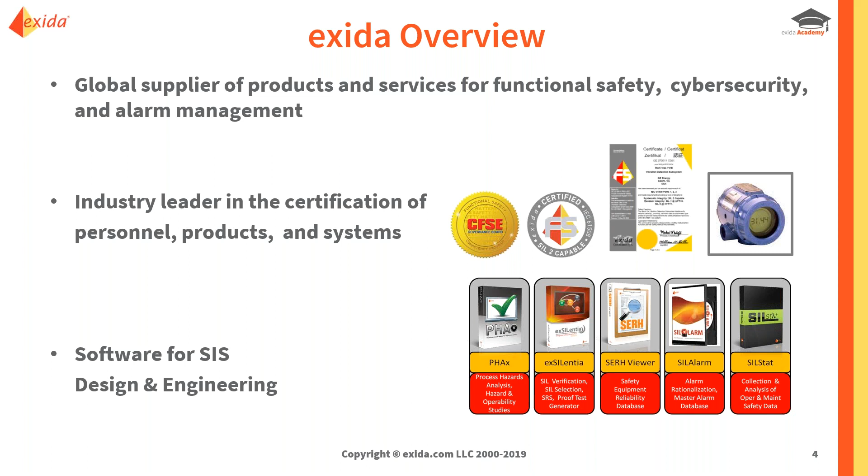The last thing I wanted to mention is we have a suite of software for safety instrumented system design that covers the whole entire functional safety lifecycle and connects with alarm management. It includes a tool called SILAlarm, which is for alarm rationalization and acts as a master alarm database.

So why don't we get started with our topic for today, which is on safe operating limits. We're going to talk about what they are, what are safe operating limits, why they're important, and then the bulk of the discussion will be on the results of a survey that we did several months ago that queried people around the world as to how they calculated and determined safe operating limits and how they used them. What we'll hopefully be able to see is some of the differences in how people approach it, and areas where training and education about what safe operating limits are for can be improved, and perhaps also where industry can jump in and make things easier for folks that need to work with safe operating limits.

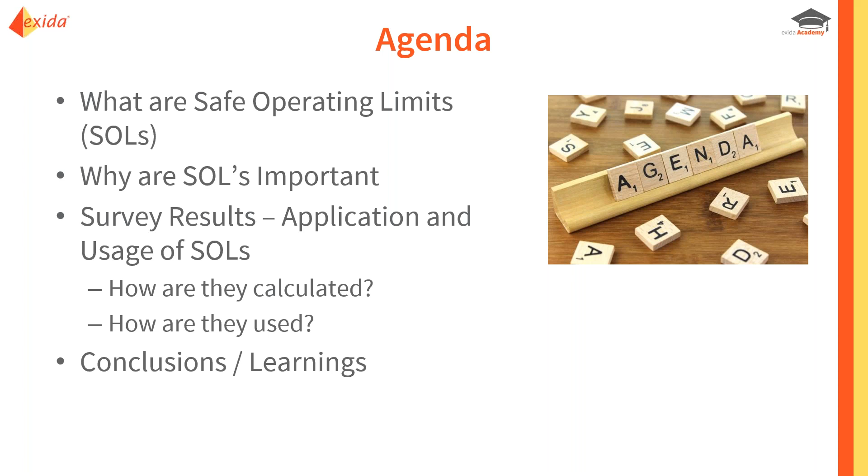This presentation we're looking through today is an outgrowth of one that was delivered recently at the 15th Global Congress on Process Safety. This same topic, the original results and a paper, were presented by my colleague, Denise Chastain Knight. One of the things that we'll have a link to after the webinar is over is the actual paper that has the details of the research in it, so you can download that and check it out if you're interested.

So let's talk about what a safe operating limit is. Conceptually, before we look at the detailed technical definitions, a safe operating limit is kind of like the speed limit for a process plant. You don't want to exceed it because bad things can happen. You can end up with an incident or an accident. So that's essentially the meaning of the term safe operating limit. Now, depending upon what region of the world you are from, you may not use this term in your day-to-day life.

You may not be familiar with it. It's specifically applicable here in the US, and it comes into vogue from the OSHA Process Safety Management regulation. That was where the term safe operating limit was sort of coined, and the requirements to have them were documented. So even if you are in a location where you don't use the term safe operating limits, or you're not required to worry about them, there's probably an analogous concept that makes this information still useful.

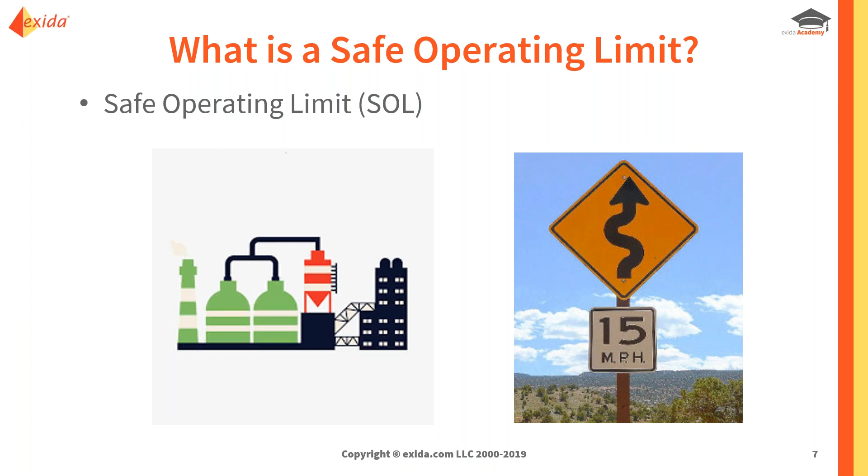So let's look at some of the detailed technical definitions. One of the problems with application and usage of safe operating limits is that there is not really a well-established definition that's consistent and easily accessible.

One of the more easy to follow definitions is on the CCPS AICHE glossary on their website, and you can see that here. And I just want to call out a couple of key elements of this definition, because what we're going to do is look at several of the definitions from different sources and kind of pull out the key parts to create our own working definition of what a safe operating limit is.

So in this particular one, the key elements that we see are that safe operating limits relate to critical process parameters, so things like pressure, level, temperature, etc. And they are established or calculated based on a combination of design limits and the dynamics of the process.

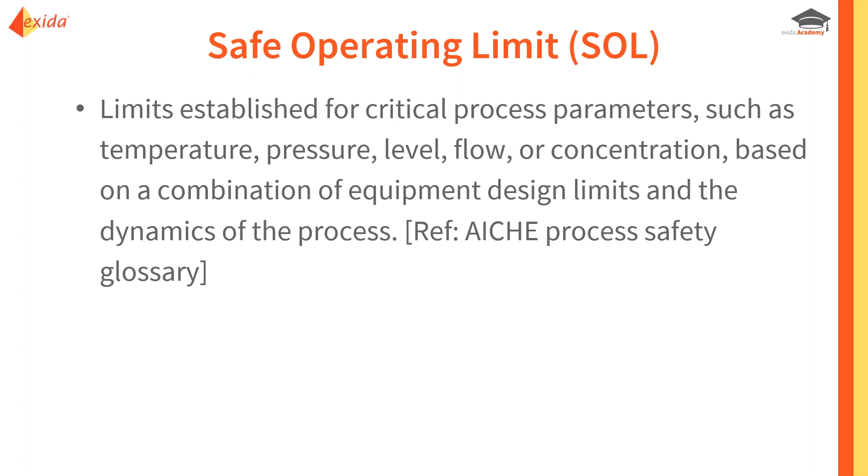Another definition coming from CCPS guidelines for engineering design, which up until now is probably the most comprehensive treatment and discussion of safe operating limits. It has a very detailed definition that you can see here.

Key elements that jump out here is, instead of focusing on limits, we're more focusing on an envelope that's defined by the limits, a safe operating envelope, with the idea that you should not intentionally operate the process beyond that safe operating envelope, or else you could end up with an incident or a catastrophic failure or loss of containment.

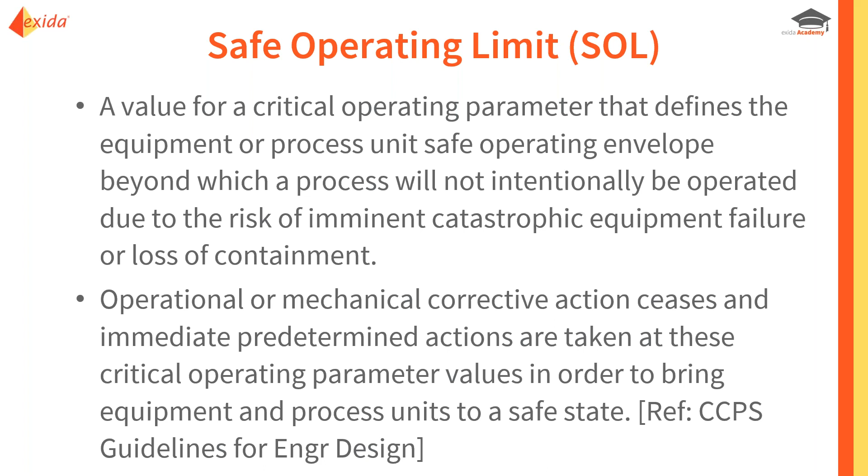The other key part in this definition is that if you exceed the safe operating limit, then troubleshooting by the operator and other investigatory steps stop, and predetermined actions must be taken. So this could be manual actions by the operator, or it could be automatic actions by a safety instrumented system. And their purpose is to take the process back to a safe state or back within the normal operating limits.

Another definition comes from a new technical report from ISA, Technical Report 84.00.04, Part 1. And this document actually does a pretty good job about expanding on what safe operating limits are, how they're calculated, how to think about them, and uses additional terminology that goes along with safe operating limits.

But here you can see their definition is a little bit of a combination of some of the things that we looked at before. But one of the new things that they bring in is the idea that the set point for an independent protection layer, like SIS trip point, for example, could coincide with the safe operating limit in some cases.

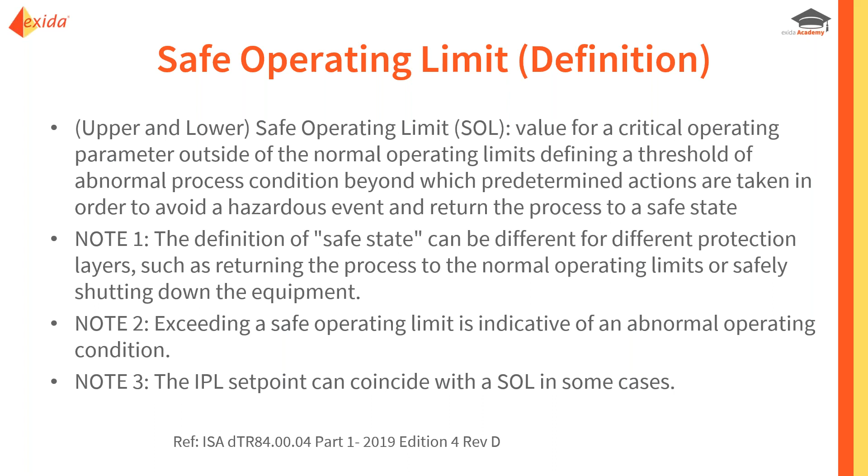So it does provide some guidance for how to think about relief valve settings and SIS trip points, how they would line up in relation to safe operating limits in the overall operating envelope.

Last thing that we'll look at is from the API. They have recommended practice 754, which is on process safety leading indicators. And they define, again, the safe operating envelope, where they more focus on the envelope as the part that's created from two operating limits. They also emphasize the element that if you go beyond or go outside that operating envelope, that's when troubleshooting stops and predetermined actions must start or take over.

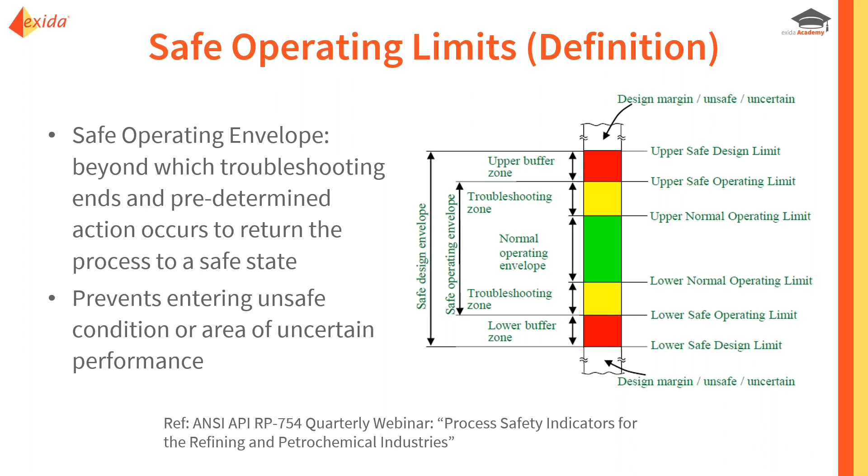And the whole idea is that this is preventing you from entering an unsafe condition or getting into an uncertain area. So that's the purpose of the safe operating limit.

So if we consolidate those together to create a working definition or a working criteria, it would consist of the following points. So safe operating limits are for critical parameters, so not every parameter necessarily would have a safe operating limit defined on it. And the safe operating limit must be outside of the normal operating limits. It kind of makes sense.

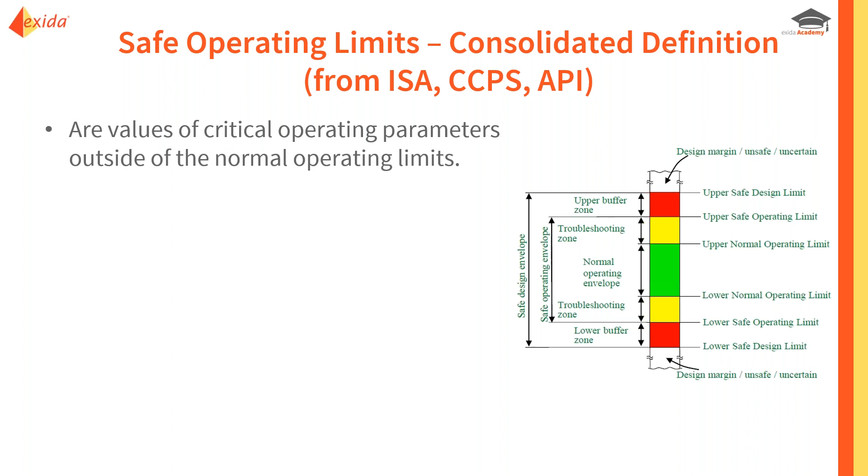Also, in terms of establishing what the safe operating limit is, that would be done by a combination of looking at the equipment design limits, more on what that is later, and the process dynamics, so rate of change, things like that.

It represents a safe operating envelope, and you should not knowingly operate the process outside of that safe operating envelope, or else if you do, then you get into a point where you must take action to take the process to a safe state. No more troubleshooting, no more optimization or control of the process. The idea is you've gone into an area where you should not be from an operational point of view, and you need to take the process to a safe state.

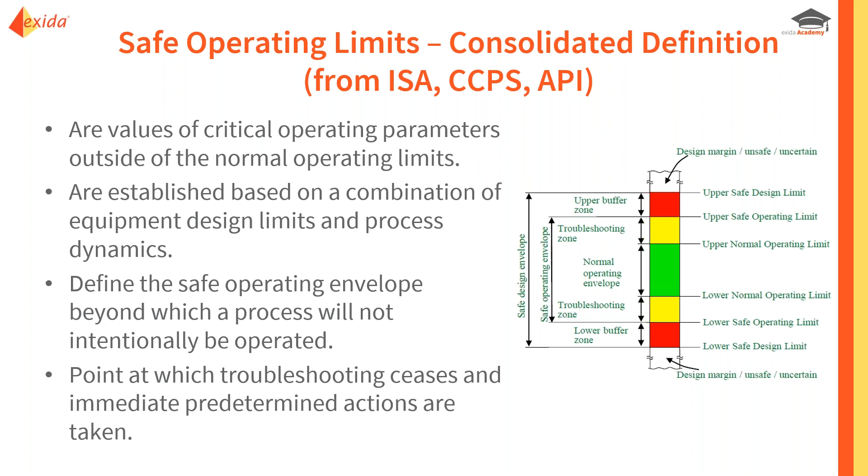So that's kind of the working definition that we'll use for this discussion as to what a safe operating limit is. So now let's talk about why they're important.

As part of the OSHA PSM regulation in the US, chemical companies and companies in the refining industry are required to calculate or determine what their safe operating limits are, as well as document the corresponding consequences of deviation and corrective actions that operators should take. So for any PSM covered part of a plant, that information must be determined, documented, and made known to people, including being put into the operating procedures so that operators are quite familiar with what those safe operating limits are.

Another thing safe operating limits are used for is they're defined as a process safety leading indicator. They're actually a tier 3 leading indicator according to this triangle diagram that we'll talk about more later. The idea is there are certain parameters that have been identified that one should track and watch, and you can use them to get a handle on where you are from a process safety management point of view and to drive performance improvement. So SOL exceedances are a specific recommended KPI, and they are a tier 3 KPI.

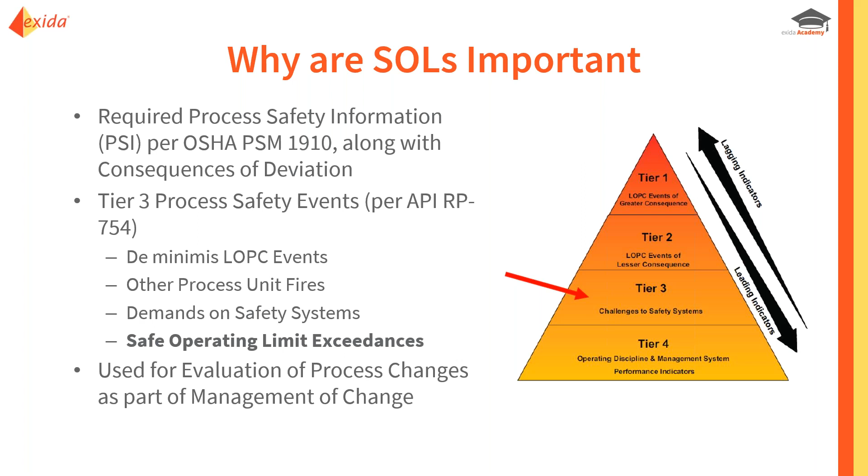The other thing safe operating limits are used for is an evaluation of management of change, particularly related to process changes, to make sure that a proposed change does not put the process outside of the safe operating limits, and if so, that would require some additional investigation, calculation, and documentation. So that's why safe operating limits are important, or one of the reasons they're important.

Another reason they're important in the scheme of functional safety is if you look at this stack up of independent protection layers, we can see that toward the bottom here is an alarm and an operator response, and then above that is a safety system and the trip. We could assume that your safe operating limits are somewhere in that region. They may be put in place with an alarm for the operator to respond to, or they may be such that if you go beyond the safe operating limit, then the SIS trips. So the takeaway is that they're one of the first layers of protection to activate.

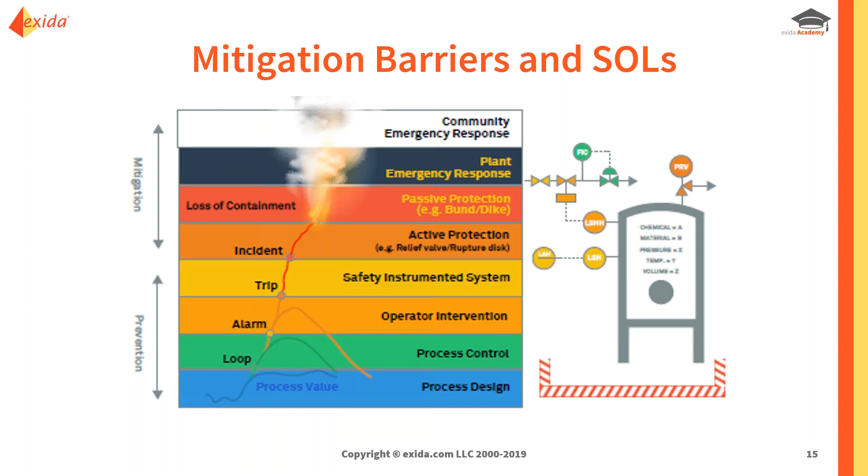So in terms of monitoring them and watching them and knowing what they are and how to calculate them, it's very important because it's a good indicator of whether you are progressing up this envelope of increasingly worse hazards or increasingly worse situations. It would help you understand how often you're potentially having demands on your safety system or your relief valves. Also, as one of the first layers of defense, if it works well, it can do a fantastic job of minimizing the demands on those other layers and preventing the escalation of a hazard to an incident. So it's really important to make sure that particular independent protection layer is working.

In terms of this survey, over 150 people responded to it. Could be some of you that actually took part in it. It was quite a global cross-section, as you can see from around the world. We had people chiming in with their information.

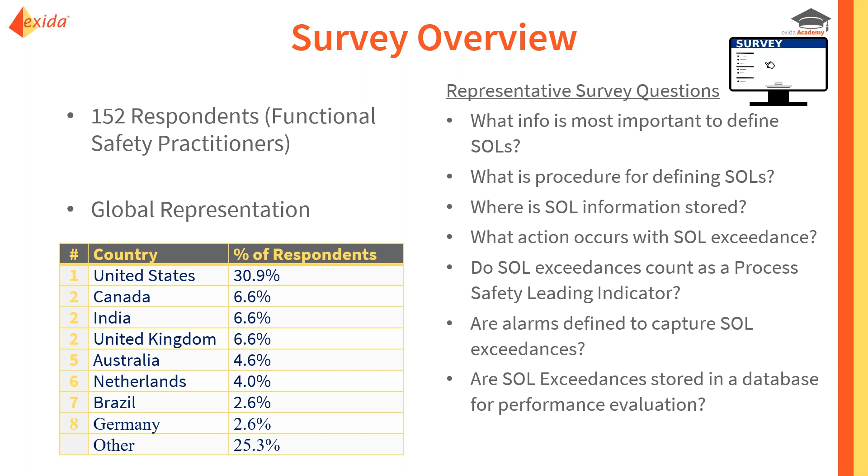Essentially what we're going to do now is go through the results, what we found, with the key questions that were asked, some of which are shown here. Things like: what information is most important for establishing safe operating limits? Where do you store safe operating limit information? What do you do when you have an exceedance? Let's take a look at some of those questions.

The very first one had to do with operational limits as a broader category. If you're familiar with defining safe operating limits, are there other operational limit categories that you also define as a company? Folks could select more than one option. You can see just about as many people indicated that they define or use safe operating limits as they do process control limits. Others indicated quality control, and then some people said they also define a whole separate category for environmental limits so that they can document emissions and effluent excursions.

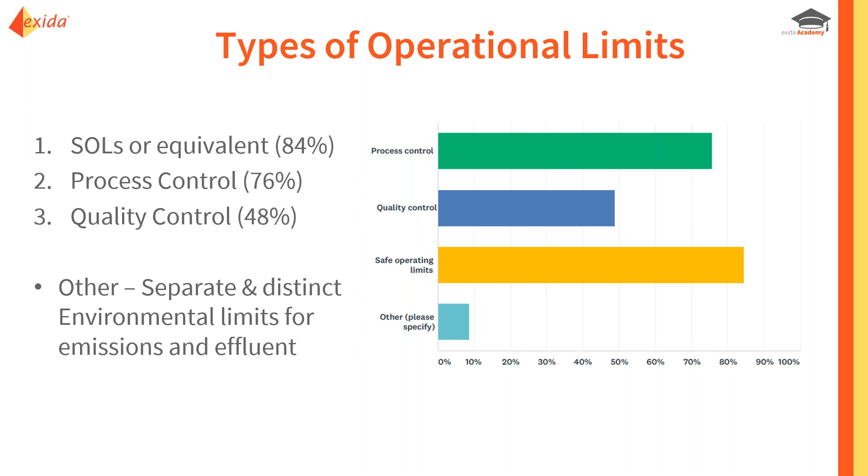Now, when it comes to safe operating limits, one of the key questions of this entire survey is: what information do you use or should you use to calculate your safe operating limits? This was a predefined list of choices. And if you remember the definition that we just talked about, where we made up a working definition, that should be brought into the thought process to understand the results here.

So the choices were: normal operating limits, safety instrumented system trip points and relief valve settings, design constraints such as maximum allowable working pressure, mechanical integrity limits, and integrity operating window limits. Based on the definition where we said safe operating limits would typically be set based on design limits and process dynamics, the expected answer was design constraints.

And you can see that that was the number one answer, but not by much. In fact, about the same number of people said safe operating limits are set by SIS trip points. And that's really not correct. That's backwards. Now, that may be an artifact of how the question was asked, or depending upon the facility...

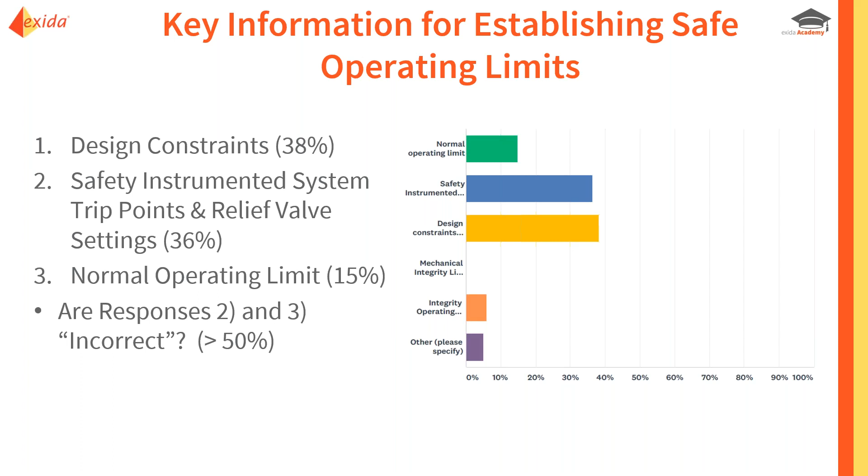So I expected some of those to be brought out as well. You can see that over half the people essentially said the SIS trip points or the normal operating limit, and those really aren't the major things that drive creation of or documentation of the safe operating limits. So this kind of indicates the need for increased training or understanding of what safe operating limits are for and how to calculate them.

Now, as the follow-up question to that, there was a freeform field for people to enter in more detail, at a high level, how they actually calculate the safe operating limits. This is just some of the selected input to highlight some of the key areas or key responses.

SOLs are defined by design limits and design constraints, as we would kind of expect, by process technology. Mechanical integrity was highlighted. Process simulation and using safety factors against design limits - there were a couple of examples of that as the methodology for documenting. Some people called out the importance of process dynamics and making sure there was sufficient time for the IPLs to respond. Another respondent mentioned risk-based inspection of equipment as it's installed and as it's working.

And then finally, there was one that said, in a lot of cases, as I mentioned, the design information is not available. So it would be back-calculated from the interlock settings or the relief valve settings, where you would assume that the appropriate calculations were done to establish them. And then by extension, you could come up with the safe operating limits.

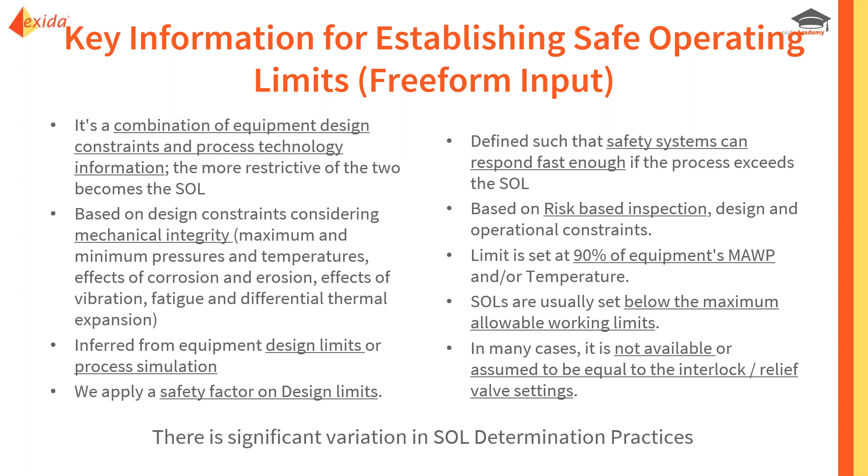So the takeaway here is that there's considerable variation in how people approach determining safe operating limits. So if you're going to use safe operating limits as a tier 3 leading indicator, the fact that everybody does it differently is going to mean that if you tried to compare results from one site to another, one company to another, you might not end up with the conclusions that you're hoping for.

Partly because safe operating limits mean different things to different companies. One of the other pieces of input that came in, I wanted to highlight, because this is pretty solid information about how we would typically think about how safe operating limits line up in comparison to other types of operating limits. What they responded with is: you have low and high settings for your operating range, and then next would come your alarm levels, and then potentially interlock levels.

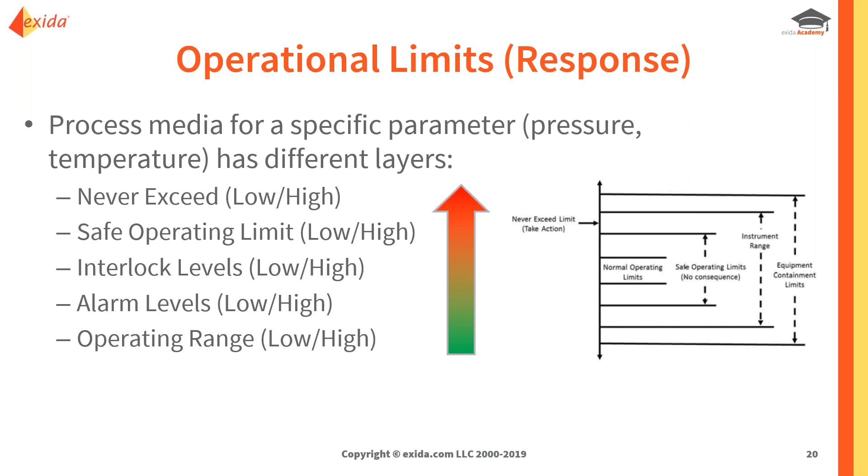Above interlock levels would come your safe operating limits, and then above safe operating limits would be your never exceed limits. We'll talk more about that term later. One point of confusion: one resource actually showed the never exceed limits and safe operating limits in a different order, with safe operating limits outside the never exceed limits, which contributes to confusion in how to establish safe operating limits and understand what they're for.

So in terms of where people document or keep their safe operating limit records, 30% of respondents said they consider the operating procedures to be the master location for safe operating limits. From an operational and operator training point of view, that's probably the best place, since those are the people who need to know what the limits are and what to do.

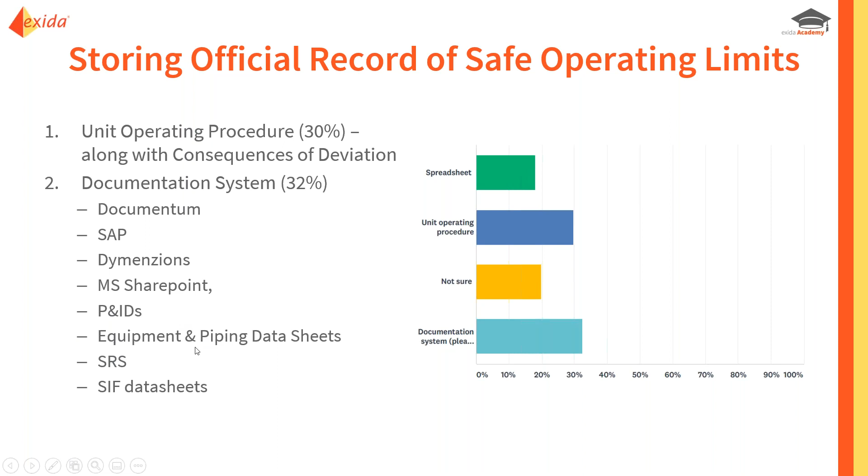However, if you're thinking about a single repository of all your safe operating limit information, and it's sprinkled throughout your operating procedures, it's going to be harder to track down and maintain management of change on those limits. So other respondents take a different approach: a single repository of safe operating limits. There was great variety in what system they use to store that information, from Documentum to SAP to SharePoint, and many other data systems or forms of documentation.

Another question was, do you periodically review safe operating limits? 63%, almost two-thirds, said yes. 37% said no or not sure.

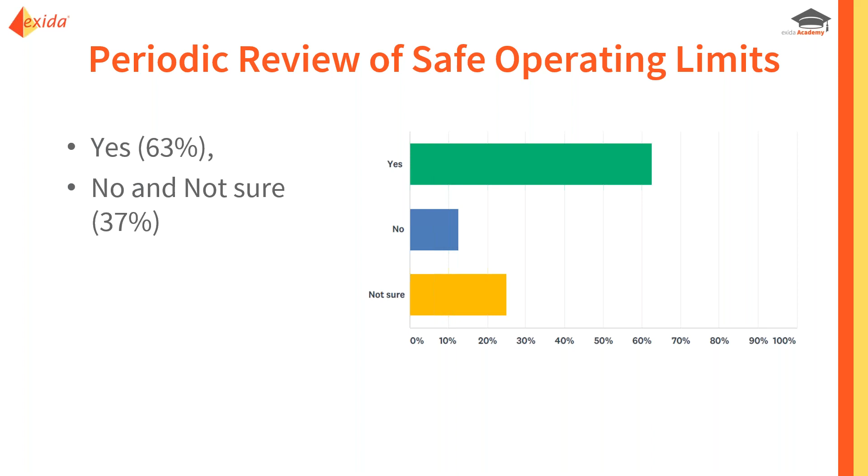What's important is that although safe operating limits might appear fixed throughout the life of a facility because they're based on design constraints, if processes, equipment, raw materials, and flows change, then it's very likely the safe operating limits may need to be recalculated or changed as well. So it is a good practice to periodically review your safe operating limits.

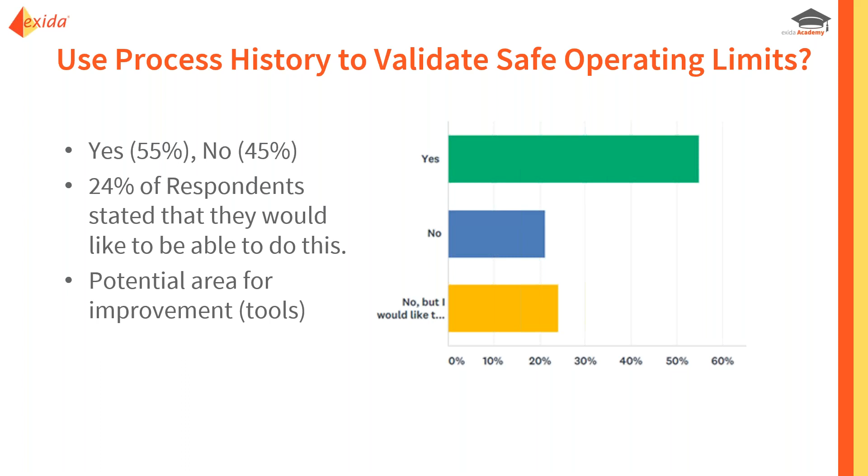Another question was whether process history, a data historian, is used to validate safe operating limits. 55% of respondents said yes, 45% said no or would want to be able to do that. Interestingly, 24% said they'd like to use their process history to validate safe operating limits, which seems to identify a need for industry, a potential area for tools to make that easy for people.

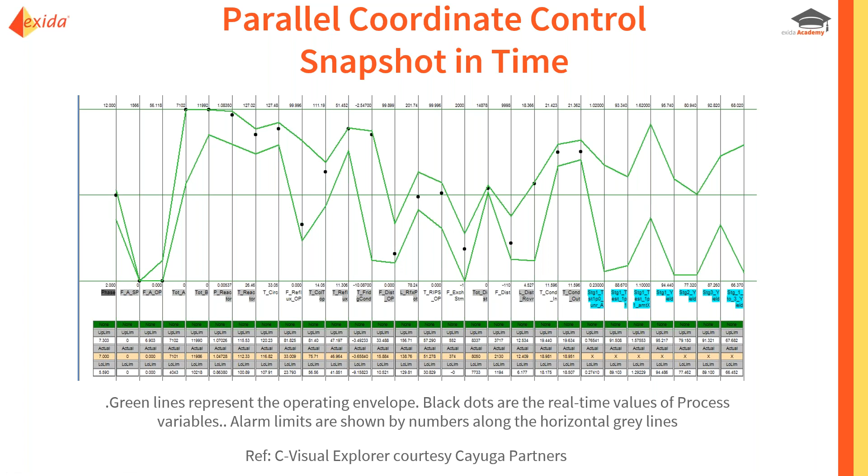Not only can you see those exceedances with this tool, but it'll also show you what else was going on at the time, and how other key process variables were behaving when you had this SOL exceedance.

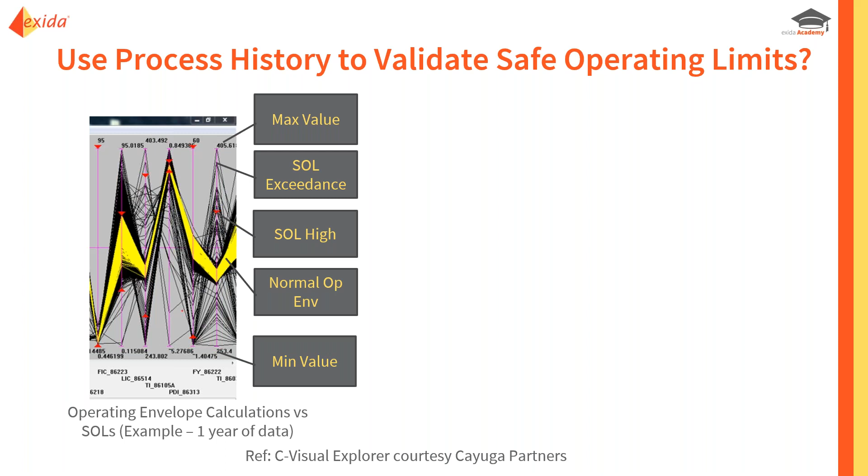So it can do a lot of useful information for you in terms of validating your safe operating limits. It could calculate the percentage of time that you're outside of your normal operating envelope, or outside of your safe operating limits. If you change the safe operating limits, it can retrospectively calculate what percentage of time you would have been outside of your safe operating limits with a certain change. So there's a lot of great stuff that it can do for you.

And as I mentioned, it really fleshes out the patterns showing the variables that relate to each other. So if you're trying to minimize your safe operating limit exceedances, not only does it give you visibility to when they're happening, but also help you figure out what caused it and what other key process variables are involved in that event.

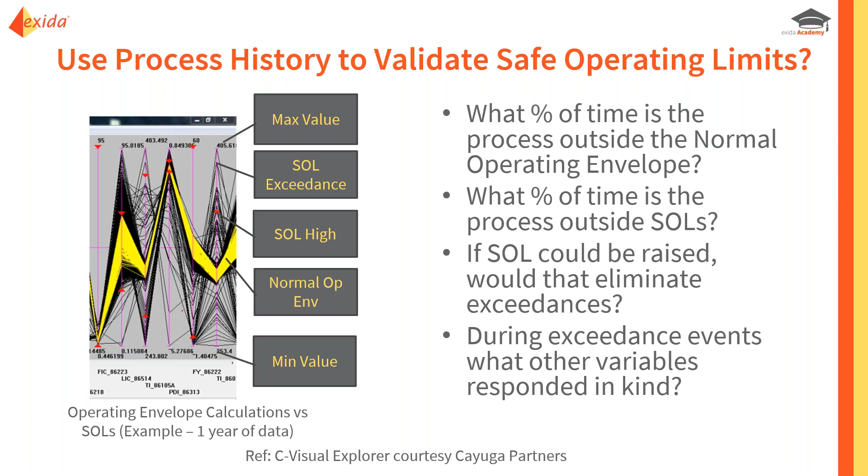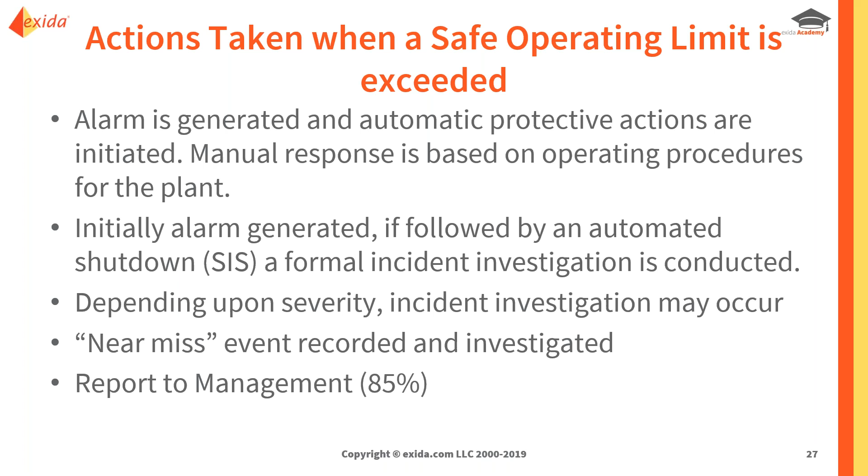So what do people do when a safe operating limit exceedance occurs? Most respondents said that they generate an alarm and take action, whether it's manual action by an operator documented in operating procedures, or an automated response from a safety instrumented system. A lot of people also referenced that an incident investigation would likely be started. Some people called out that they would categorize this as a near miss event and record it as such. And 85% of respondents said that one of the things they would need to do if they had a safe operating limit exceedance was notify management or report that to their management.

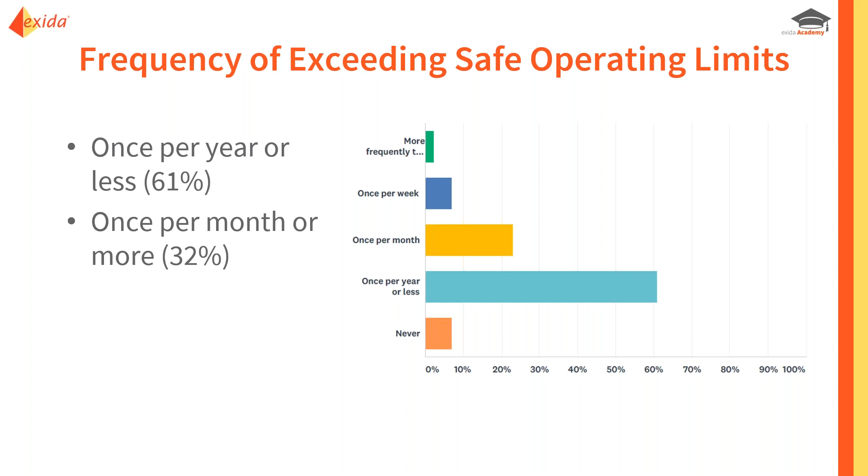So how frequently do these safe operating limit exceedances occur? Without the actual data and systems to do these calculations, this is kind of just an estimate. We can see that 61% of respondents thought it happened about once a year or less, and 32% thought it happened once a month or more frequently. So it's quite across the board there.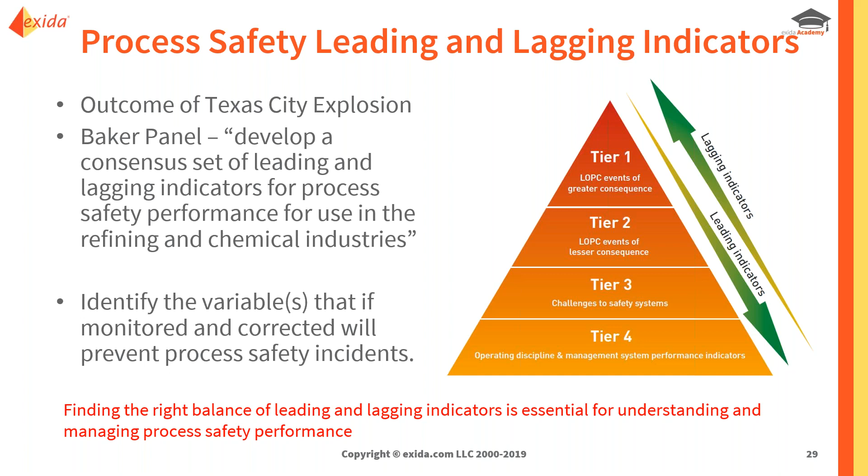And the area that you can actually track more and see changes is in the tier 3 and tier 4 leading and lagging indicators. In the tier 3 category, which is considered the challenges to your safety systems, that's where the safe operating limit exceedance resides. So the whole idea with leading and lagging indicators is to define some metrics that one can follow, calculate, monitor, and that will directly help you prevent process safety incidents from occurring. It's believed that monitoring of safe operating limits does have a direct correlation in preventing process safety accidents, because if you're monitoring those and seeing that those events are going down, that also means the number of challenges on your subsequent layers of protection - your safety instrumented systems or pressure relief valves - are also being reduced.

Now the IOGP reference on process safety performance indicators, report 456, which just came out in November 2018, goes through and documents the different tiers of indicators - what are examples, what are considerations, what do you think about. And one of the examples they fleshed out in detail for tier 3 was the violation of a safe operating limit, in this case for a storage tank. Because it is quite amazing the number of tank overflow incidents that continue to occur, even with alarm management programs and process safety management programs. So safe operating limit excursions was one of the examples called out in that document.

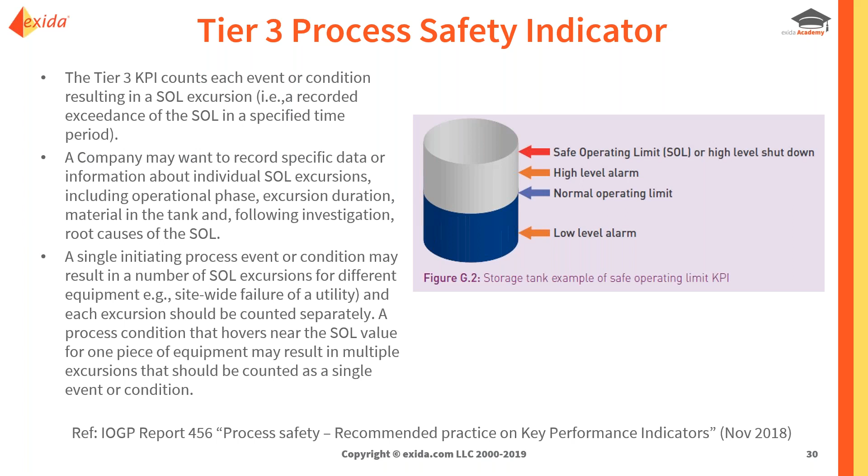So then the question was, how many respondents actually use safe operating limit exceedances as process safety leading indicators? And the answer was about 63% said yes.

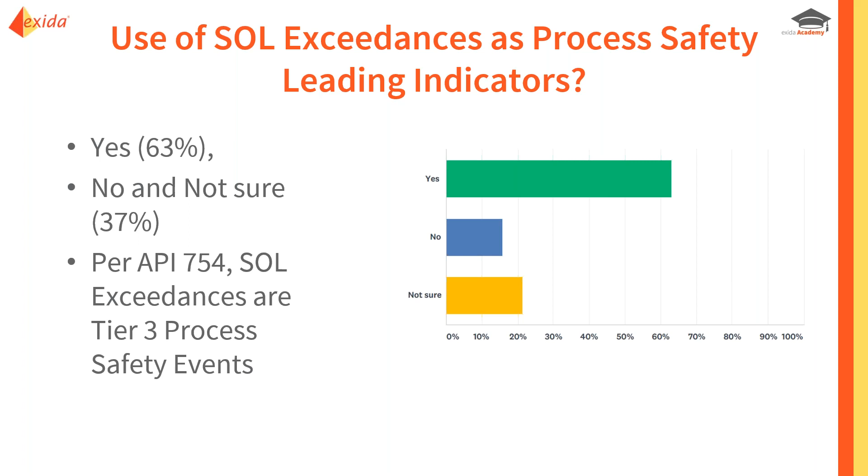Now, if all of the respondents worked in the US for a company or industry covered by OSHA PSM, that answer should be 100%. But because this was a global survey and the need to document safe operating limits is primarily an OSHA-driven requirement, the usage of leading and lagging indicators is a global industry best practice. So this probably provides some indication of the adoption of this, but expecting 100% probably wasn't realistic given the demographics of the respondents. So this does perhaps give some indication that the knowledge and understanding of safe operating limits, what they're for, and leading indicators probably could be improved.

One of the other questions asked about operators, in particular whether they are aware of safe operating limits and trained on them. 82% of the respondents said yes. And ideally, that should really be 100%. Whether you use the term safe operating limit or not, whatever your analogous term or concept is, operators really do need to be trained on what the safe operating limits are for their associated operating areas. That should be part of their operating procedures, reviewed on a regular basis as part of recertification of the operator or refresher training. So those are pretty important things - for them to know the safe operating limits, what to do in the event that they exceed one, and what the consequences are if they don't respond. All that should be well drilled for the operator.

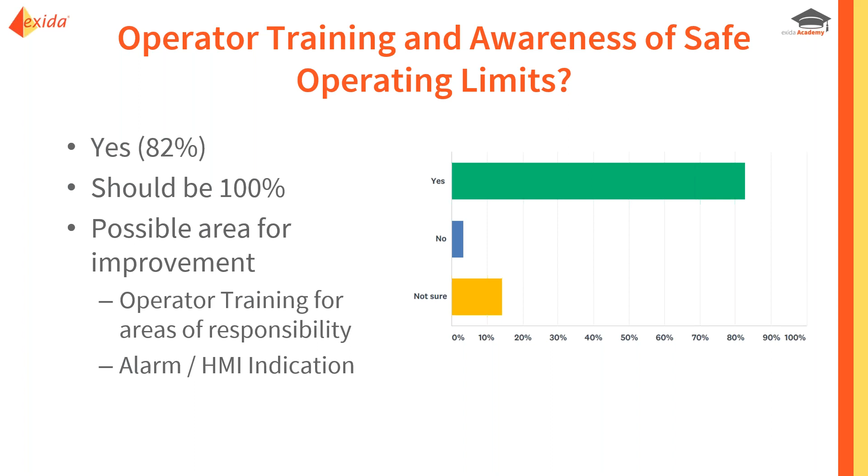In addition, the information about safe operating limits and the visibility for the operator should be thought about in the alarm system, and considered significantly in terms of presentation on the HMI screen - whether it's different from other alarms, perhaps the color, the priority, and the horn tones used to announce that one of those alarms exists. It definitely makes sense to think about whether special treatment would be warranted for SOL limits being violated.

So one of the other questions was, would it be beneficial to have safe operating limits available when you're conducting a PHA, a LOPA, or an alarm rationalization? And 95% of the respondents said yes.

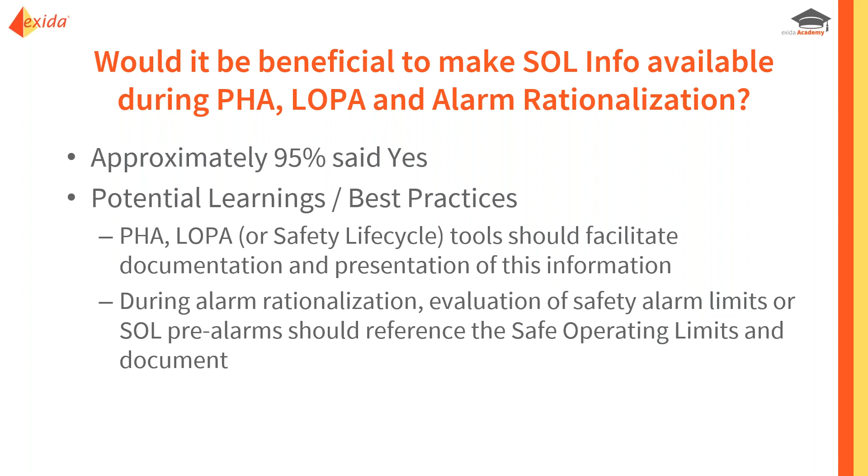So that is a potential learning or takeaway for tools that help document process hazard analysis, LOPA, and alarm rationalization - that there should be a way to easily document safe operating limits and other operating envelope considerations and design constraints, and to be able to reference that appropriately as you're going through the task.

Now, when it comes to alarm rationalization, certainly alarms that are there to prevent an SIS from tripping, a pre-trip alarm, or to prevent escalation outside of the safe operating limit - information should be available about what the safe operating limit is, because the limits should be set in relation to the design constraints or other layers of protection.

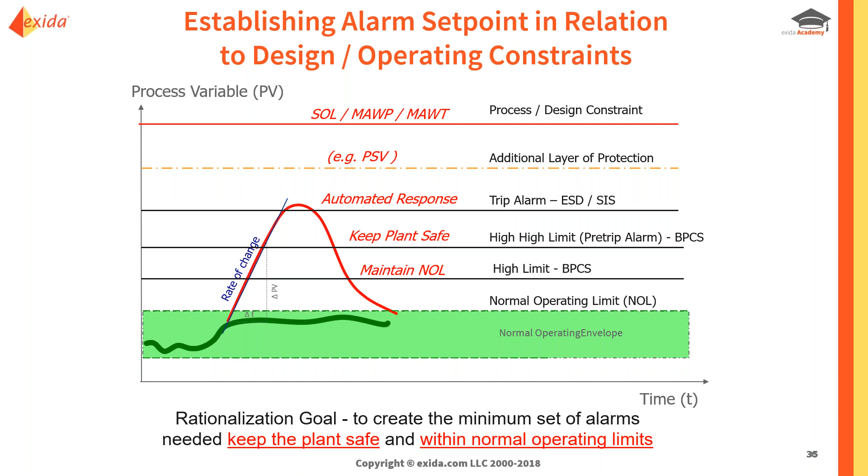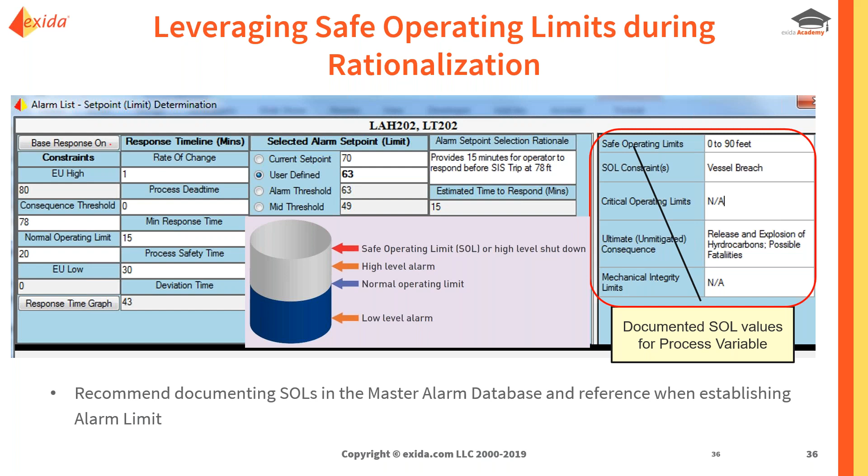So it would be very beneficial, very useful, very important to have information on your safe operating limits, ideally right in your master alarm database, so that you can factor that in when you're evaluating whether the alarm limit is set appropriately. Here you can see an example from our SILAlarm tool showing the ability to capture and see what the safe operating limits are when we are defining what the alarm limit is.

So then, speaking of alarms, the next question was, do you define alarms in the control system to help you indicate an SOL exceedance? 69% of the people said yes, and this is really different from my personal experience, having done multiple alarm rationalizations and philosophy creations over the last 10 or 15 years.

I don't see this talked about very often. So the question is, is this data misinterpreted? And I think perhaps the question wasn't framed specifically enough. It could have been interpreted as, do you get an alarm from the events that occur when a safe operating limit is exceeded, such as a relief valve lifting or an SIS tripping? You may get alarms or notifications associated with them, but not necessarily related to the safe operating limit unto itself. Part of what this question was getting at was whether people use alarms to identify that a safe operating limit has been exceeded.

Now, if it's an alarm that the operator needs to respond to, then for sure you have alarms to do that. But if it's for tracking purposes, it might still be a good idea to use the alarm system, because it's the best centralized data repository of the performance data. So one could define alarms to indicate safe operating limit exceedances and set the priority to a log or journal, for example, where it's not presented to the operator. It just goes into the historical archive so that you could run reports and find out how often and when your safe operating limit exceedances occurred.

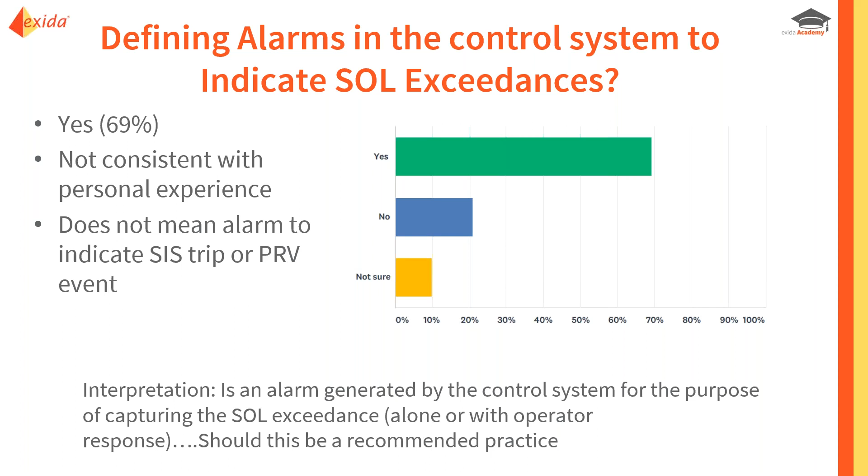Now, one of the other pieces of information gained as part of the study was that many people who record SOL exceedances or need to document them use a different system other than their control system, their HMI, to do that. And it would make sense to me that it would probably be best if it was in the DCS rather than a totally separate system that's one or two layers removed from the real data and the real action.

In terms of the recording of safe operating limit exceedances, 52% of the respondents said yes, 48% said either no, that they don't, or they don't but they plan to in the future. So again, this might be an area where tools could help make this process easier for people, and there appears to be a desire to do that.

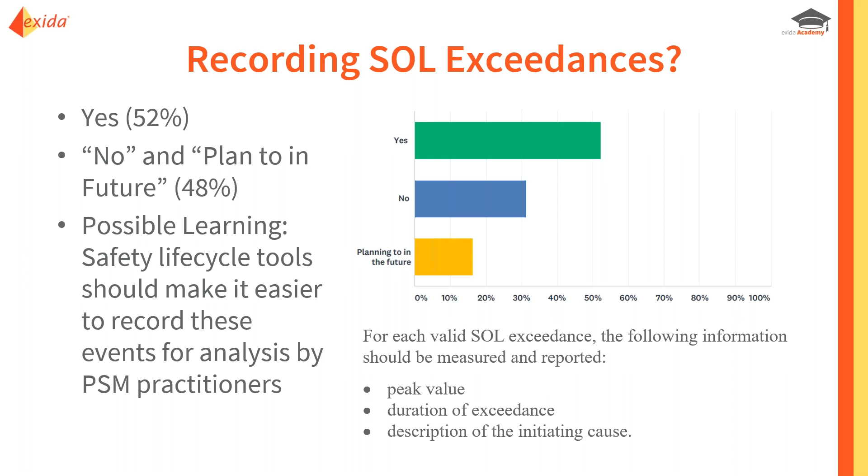The API standard talks about some of the other information that should be documented along with the exceedance, stuff like what was the peak value, how long it was in exceedance, and ideally to determine and document what the initiating cause was.

Now, one of the paths to increased standardization and adoption is a better definition for safe operating limits. It's also definition and consistent use of other terminology related to safe operating limits. We've talked about two different terms, one being design limit and another being never exceed limit. Now, the design limit is actually defined in the new ISA technical report number 4, which has some good definitions and guidelines for design limit, never exceed limit, and shows it pictorially in relation to the safe operating limit.

So I think for the first time, you have a figure that shows you where the normal operating limit is, where your safe operating limit is, how that compares to your never exceed limit, your design limit, and then where you would expect your IPLs, your independent protection layers, to be staged. Typically, their set points would be between the safe operating limit and the never exceed limit.

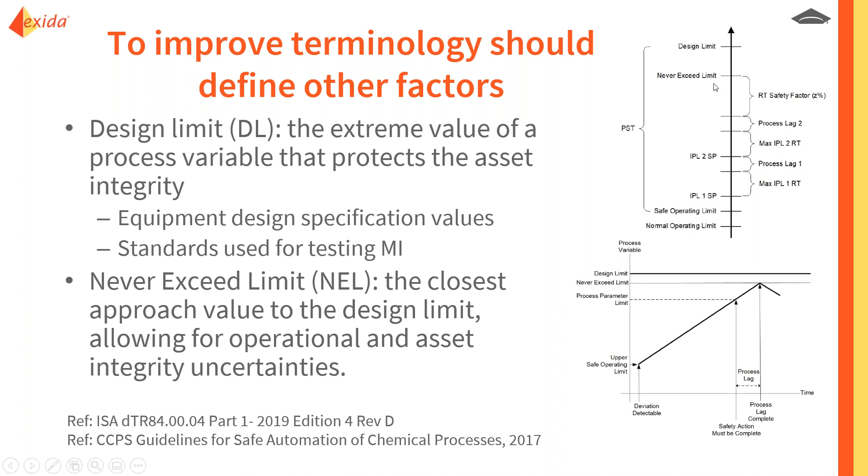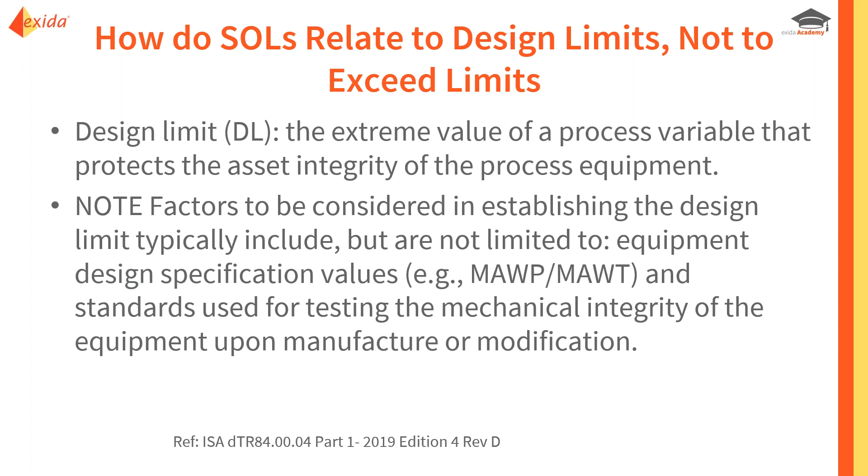The next couple slides provide additional detail on the definition for design limits and not-to-exceed or never-exceed limits. Design limits here, you can see it talks about mechanical integrity, and it talks about use of design specification values like maximum allowable working pressure, which is a common thing that people use to help establish safe operating limits.

When it comes to the never exceed limits, this is a pretty interesting and important concept. It talks about the factors used to define the never exceed limit, and they start with the design limit, but it also talks about age of the equipment, the operating environment, and the maintenance and integrity. So the lifespan of the equipment and the condition of the equipment actually would impact what the never exceed limit is. So the design limit may not change over time, but the never exceed limit might, to indicate that the integrity of the equipment has changed based on the fact that it's been in service for 20 years or whatever.

So that's additional information to help understand how safe operating limits are calculated and how they compare to other known values.

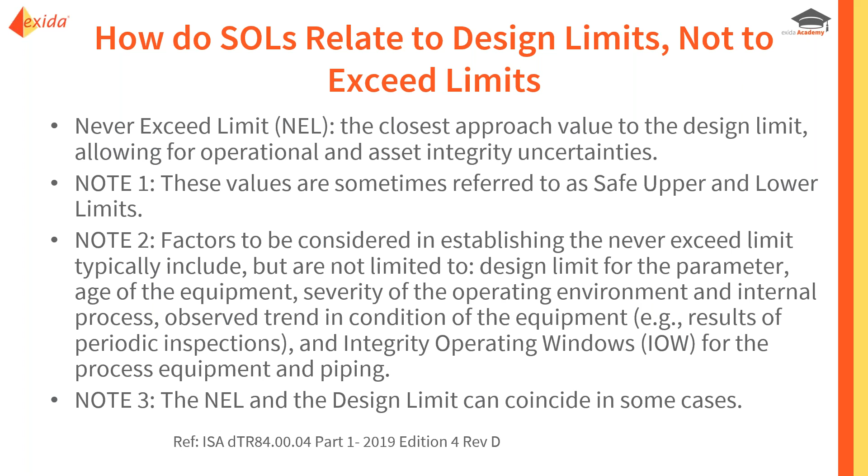Now, there was a paper presented at last year's Global Congress on Process Safety that talked about safe operating limits and how you define them and what you do with them, similar to what we just talked about. That was done by a gentleman from Celanese, and these are some of the key takeaways they had in terms of the characteristics for what defines good safe operating limits.

I just want to go through them quickly as part of this presentation.

Safe operating limits, if they're defined well, would be indicative or predictive of Tier 1 process safety incidents. The idea of having a good Tier 3 leading indicator, monitoring it, and showing progress in eliminating issues means that, if it's a good leading indicator, you should effectively be reducing the likelihood of a Tier 1 event.

They also thought that the number of safe operating limits defined for a unit should be relatively few, enough that an operator could actually commit them to memory and remember them. They also pointed out the use of design limits when establishing safe operating limits.

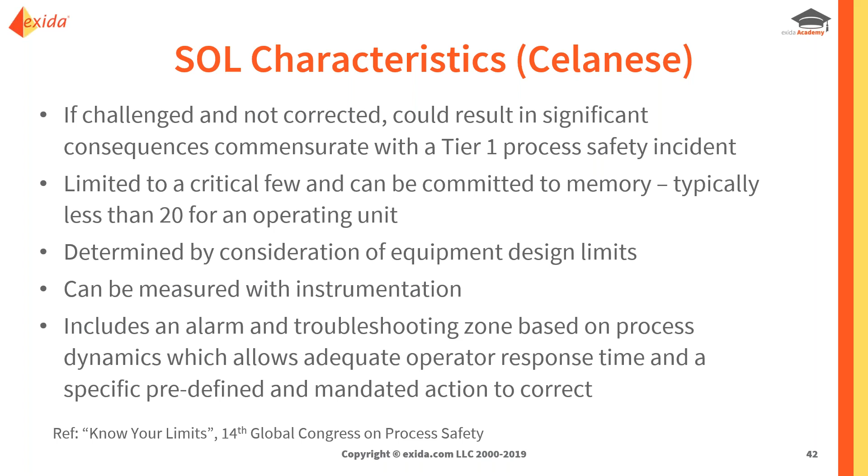They also talked about the importance of configuring and documenting alarms with operator actions based on the rate of change of the process, to make sure the operator had sufficient time to respond to the alarm and prevent escalation of the incident.

So, drawing to a close, here's a summary of what we've been talking about and some conclusions. We discussed some of the different ways safe operating limits are calculated, the different thought processes, and the different parameters used to calculate them.

If there are differences in how limits are calculated, any assessment of how effective Tier 3 leading indicators are for safe operating limits needs to take that into account, since safe operating limits may differ from one site, facility, or company to another. That impacts how you can compare leading indicators from one site to another.

This highlights the need to come up with a more standard definition and more accepted, consistent terminology, such as design limits and never-exceed limits.

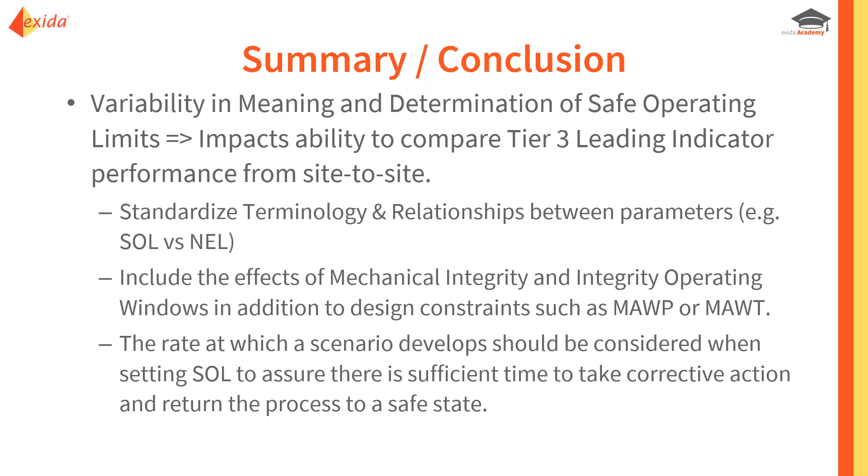Another takeaway is that, in addition to design limits and constraints such as maximum allowable working pressure, we should also consider mechanical integrity limits and integrity operating windows as part of establishing safe operating limits, along with the importance of the rate of change of the process in establishing effective safe operating limits and ensuring appropriate action can be taken.

In terms of lessons learned, we highlighted areas where additional training or education would be helpful, not only in determining safe operating limits, but in the usage of leading indicators, and certainly in communicating to operators the significance of what safe operating limits are for and what they mean.

We also highlighted a couple of scenarios where safety lifecycle tools could better support what the safety practitioner needs to do with safe operating limit information.

We also talked about connecting safe operating limits and alarm management, making sure safe operating limits are referenced or known during the rationalization process, and prioritized accordingly based on the operator's response—potentially using the alarm system as a means of capturing safe operating limit exceedances—as well as ensuring process dynamics give the operator adequate time to respond.